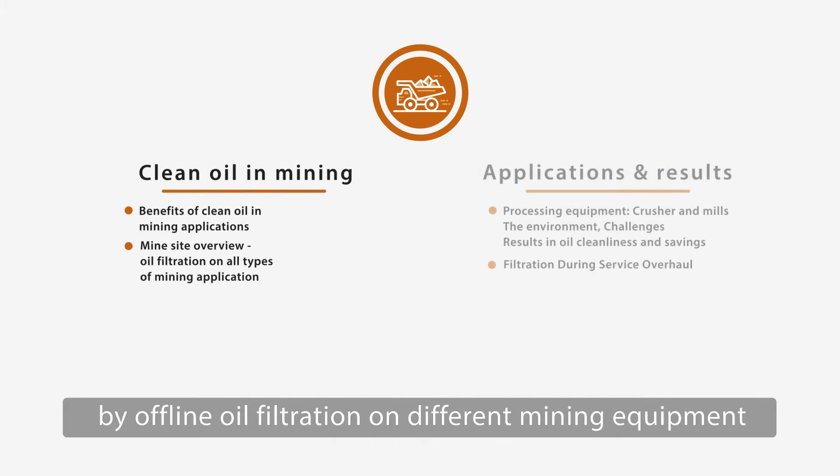Today we'll talk about what can be achieved by offline oil filtration on different mining equipment, focusing on crushers and mills and mobile equipment. So what will clean oil give you? Well, it will increase the reliability and profitability of the mine, reducing the downtime. You'll be able to eliminate 75% of the oil changes. That means one yearly oil change on crushers and mills instead of every 3 months. That's good for the OPEX as well as the environment.

You'll also be able to decrease the downtime by up to 75%. And this is where the real savings can be found, by increasing the production and minimizing the downtime. And finally, you'll be able to reduce the spare parts consumption by up to 60%, meaning longer life for mechanical wear parts such as bearings, gears, valves, etc., and create more reliable equipment.

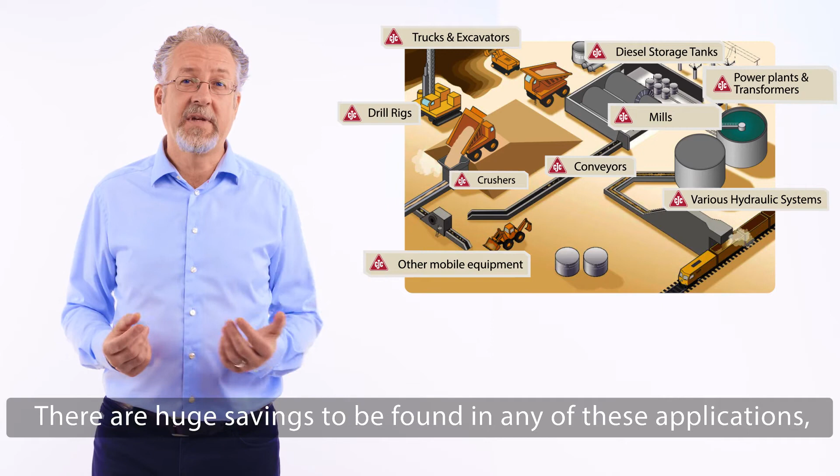This overview shows mining applications where oil is present and contaminated. There are huge savings to be found in any of these applications, but today we'll focus on crushers, mills, and mobile equipment. Crushers and mills are part of the processing equipment, and they live in a very dirty environment. So the dirty oil will decrease the lifetime and reliability of critical components such as bearings and gears.

Clean oil, on the other hand, means fewer oil changes are needed, longer lifetime of mechanical spare parts and more reliable processing equipment. The longer oil life is good for your OPEX as well as the environment.

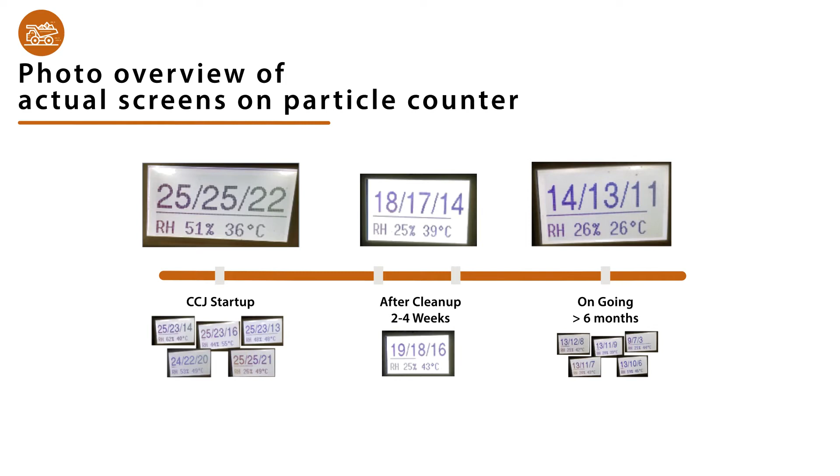This is a case from a trunnion oil system on a ball mill, equipped with an offline filter. You can see before the filter was started, the ISO cleanliness was in the 25, so very contaminated oil and full of particles. In the initial cleaning phase, we are able to maintain the oil at an ISO code 18 because there's still contamination in the oil and on the components.

After the initial cleaning phase, we're now able to maintain the oil at a very clean 14/13/11 on the trunnion system. And since 99% of the particles have been removed, this system is much more reliable and the mine sees great operational savings.

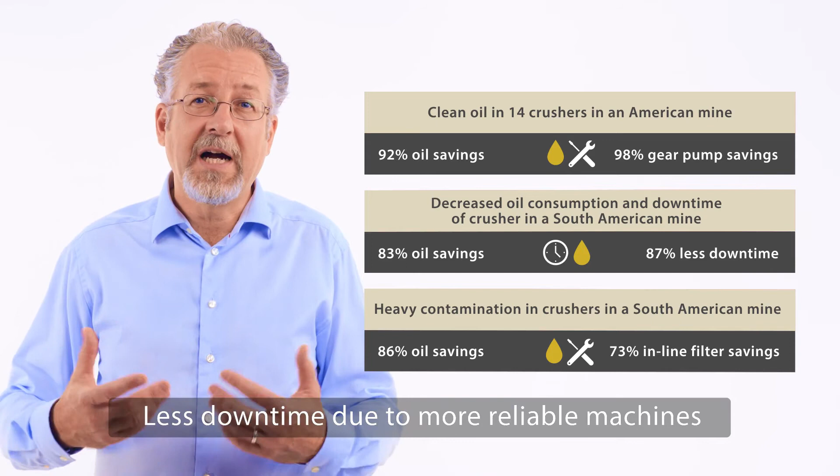Here are a few other cases on crushers where you see oil consumption being reduced by 83 to 92%. Also, large savings on pumps and inline filters go directly onto your operational cost. Less downtime due to more reliable machines, less oil and parts being changed means a chance to get a higher profit.

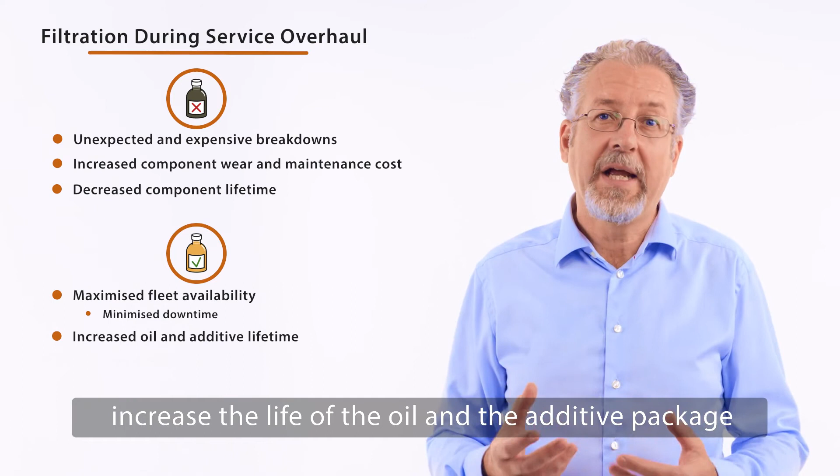Huge savings can also be found on mobile equipment where unexpected breakdowns are very, very expensive. Dirty oil will increase the component wear and the maintenance cost. It will also reduce the lifetime of the machine. Clean oil will maximize the fleet availability, increase the life of the oil and the additive package, resulting in lower cost for oil, spare parts and maintenance.

So to conclude, I'll end with the slide I started with. By circulating clean oil in your processing equipment as well as your mobile vehicles, you'll get a more reliable and profitable mine with less downtime. So you'll be able to eliminate 75% of the oil changes, decrease the downtime by up to 75%, and reduce the spare parts consumption by 60%.